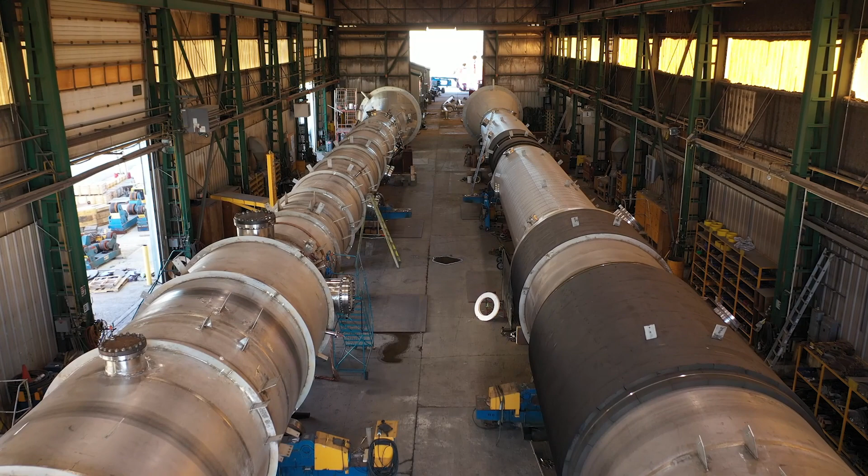As a leader in the Canadian specialized transportation industry for over 35 years, NCSG Crane and Heavy Haul was commissioned to transport 2 demethanizer towers sequentially in the summer of 2022 from Edmonton, Alberta to Mariana Lakes, Alberta, approximately 385 kilometers apart. Rather than the most direct route, NCSG utilized Alberta's high-load corridor.

The high-load corridor consists of designated highways that have the overhead utility lines raised to accommodate loads up to 9 meters high unless noted otherwise. The government funded the initial corridor construction, with the costs recovered from the users of the corridor through permit fees.

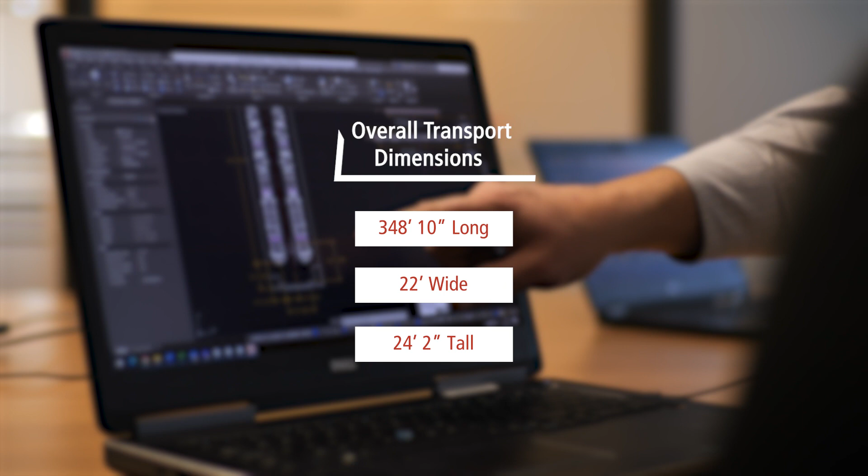The tower dimensions were 182 feet long, 15 feet 10 inches wide, and 17 feet 7 inches tall, each tower weighing 562,452 pounds. Overall transport dimensions were 348 feet 10 inches long, 22 feet wide, and 24 feet 2 inches tall.

Initial project discussions and planning began 2 years prior in the summer months of 2020. NCSG was officially awarded the project on September 1, 2021.

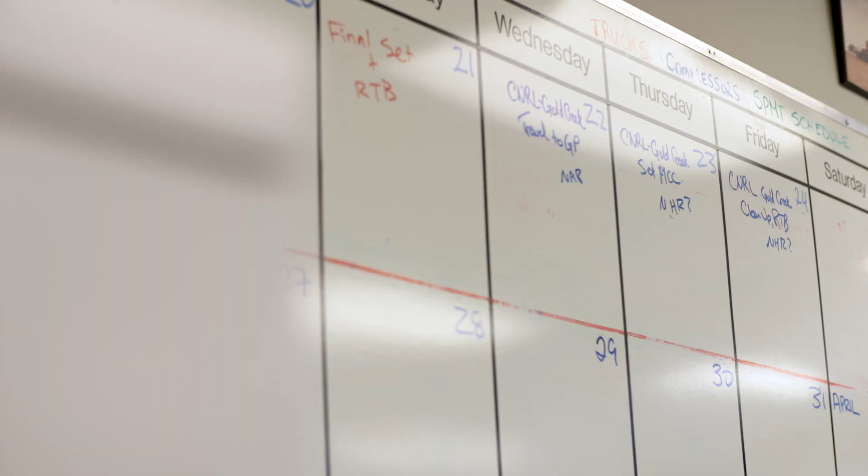Once awarded the project, NCSG Crane and Heavy Haul went to work, assembling a team including a project manager, permit coordinator, logistics specialist, engineers, and crew members. What sets NCSG apart from other companies would be our people and their willingness to find solutions for our customers' problems.

In its 35-year history, having never before completed a bunked 4-file utilizing a hydraulic trailer setup, nor transporting a load of this weight or magnitude, NCSG had to step outside of their comfort zone and deliver creative solutions for their client.

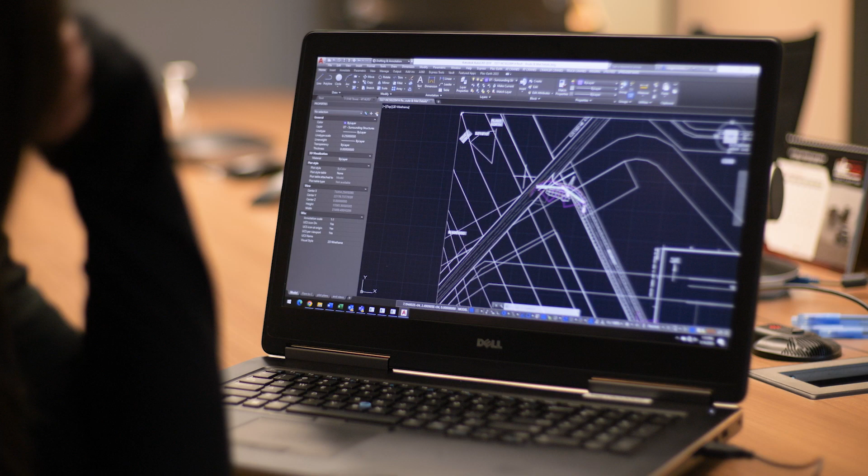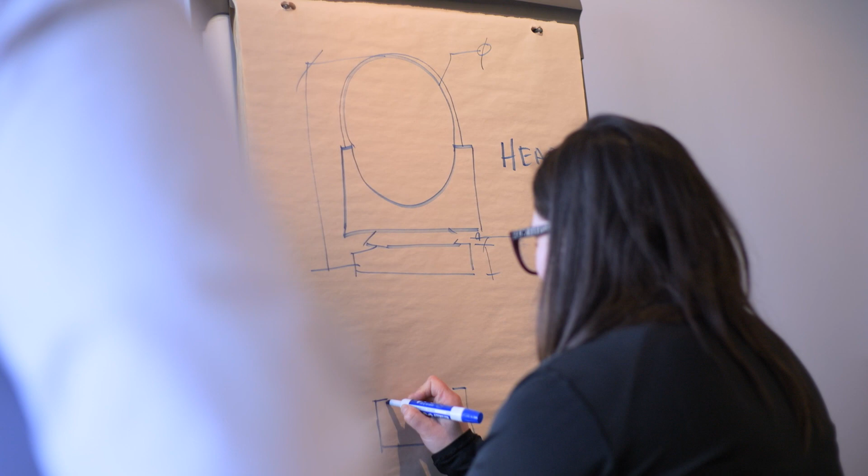The team worked efficiently and effectively, conducting route studies, applying for necessary permits, fabricating a custom steering frame, overcoming supply issues in order to source high-friction load securement rubber out of Eastern Canada, and even worked in partnership with a fellow SC&RA member to source turntables and modify saddles, customizing them to the shape of the tower.

The custom-built adjustable steering frame that NCSG had designed and fabricated was extremely innovative. The frame was designed to keep the rear trailer in alignment with the tower and lead truck along straightaways and minor curves in the road while maintaining consistent speed.

The steering frame was also a safety and efficiency innovation, as it eliminated the need for a steering operator for the bulk of the transport. The steering operator was only required along tight curves and at critical locations where the hitch was first disconnected.

The final configuration utilized 368 wheels with a 4-file, 14-line consecutive axle hydraulic platform trailer in the front, a 2-file, 18-line consecutive axle hydraulic platform trailer in the rear, 1 pull truck, 2 push trucks, 1 assist truck, 2 supervisors, and 5 pilot vehicles.

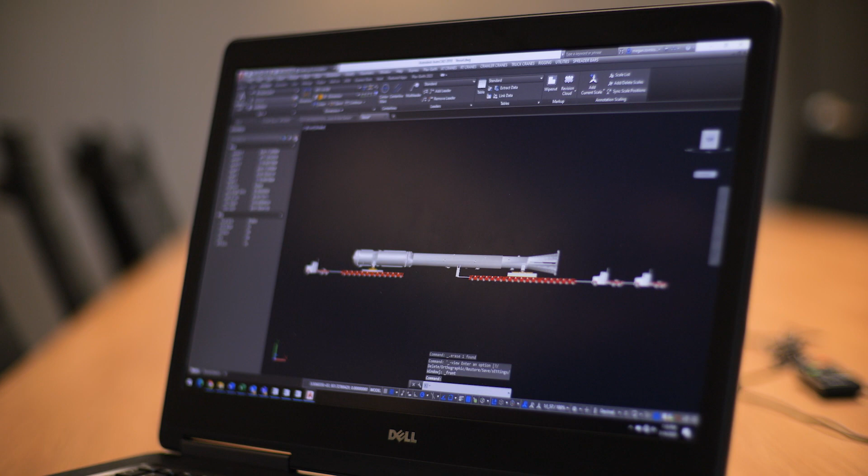Despite efforts in the planning, coordination, and customization phase, the original schedule was pushed back to October and November, as tower fabrication and site preparation had taken longer than anticipated.

Due to the delay in schedule, NCSG had to search for assistance in sourcing a gantry and SPMT for loadout, as NCSG's equipment was committed to other projects on the new loadout dates.

Working diligently with the first 2 moves approaching, NCSG was able to overcome a second and third hurdle: a power pole impeding the path of transport and a culvert on the route to the high-load corridor.

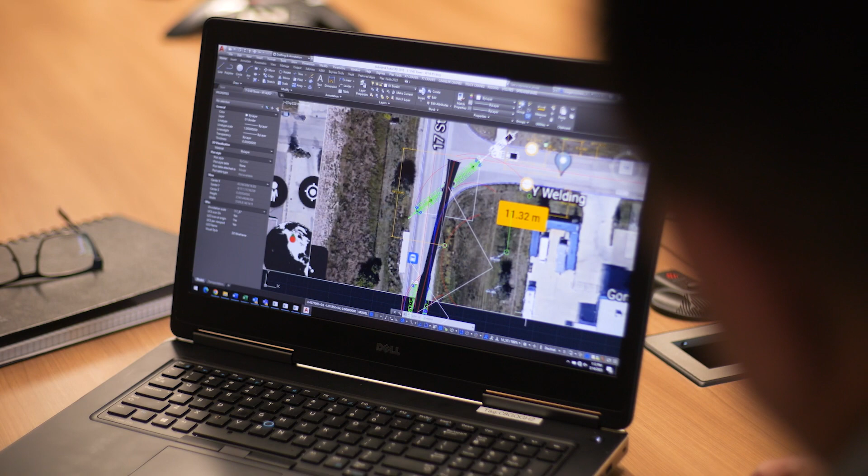With the assistance of a third-party company, NCSG was given clearance that the culvert had the capacity to cross based on the transport configuration. Working alongside the City of Edmonton and utility crews, NCSG was also able to have the power pole removed just 3 days before the first tower was scheduled to pull out of the fabrication facility.

In October of 2022, the first of 2 demethanizer towers was now completely fabricated and ready for transport. One of the biggest complications for NCSG came before Tower 1 even hit the highway.

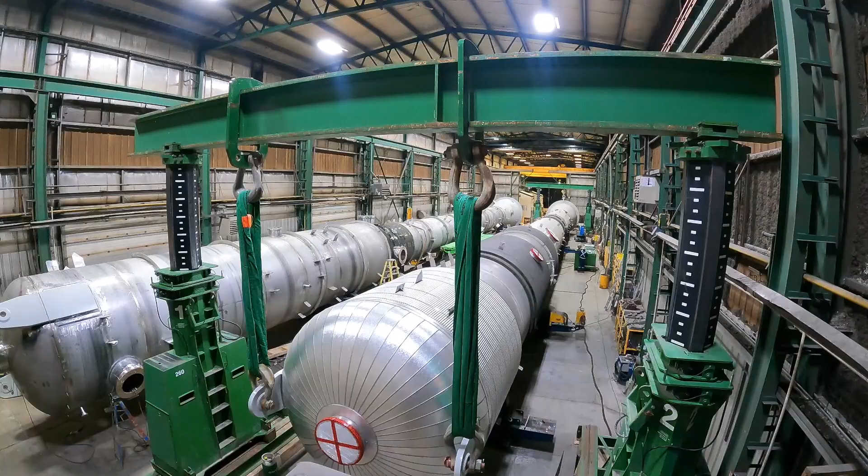Due to their sheer size and weight, removing these towers from the facility onto the trailers for transportation was no easy feat.

Utilizing gantries was the plan to get the tower loaded onto SPMTs. We initially had to set up the gantry, install the saddles, and then load onto the SPMTs, and then we were able to pull it out of the shop.

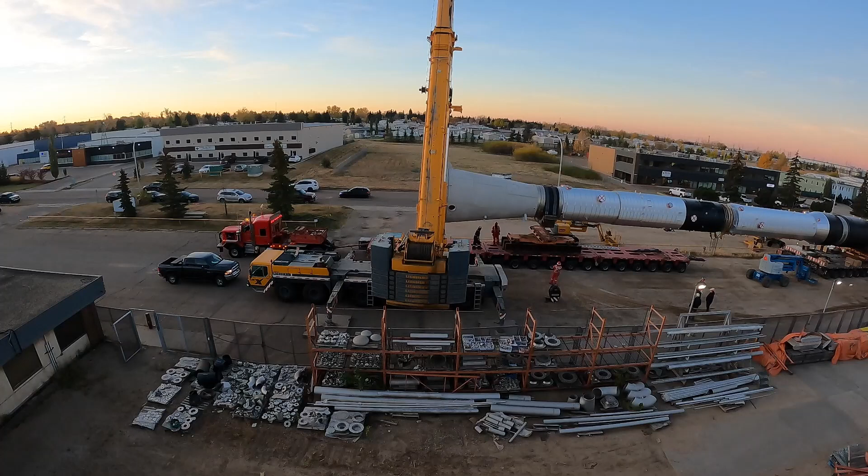With a full police escort and the first tower loaded and secured, NCSG was en route to the high-load corridor. The last obstacle in the superload's path was a railway crossing.

NCSG enlisted the support of the Canadian National Railway to supervise, oversee, and time the superload's crossing to ensure safety was maintained and train schedules were not impacted.

NCSG also enlisted the support of a third-party engineering firm who followed the load to monitor each of the 10 bridge crossings along the route.

Over the tracks and onto Alberta's high-load corridor, it was smooth sailing and business as usual for the experienced NCSG team and supporting companies. From the fabrication shop to site, the transport was completed over 5 days with 4 predetermined staging locations along the route.

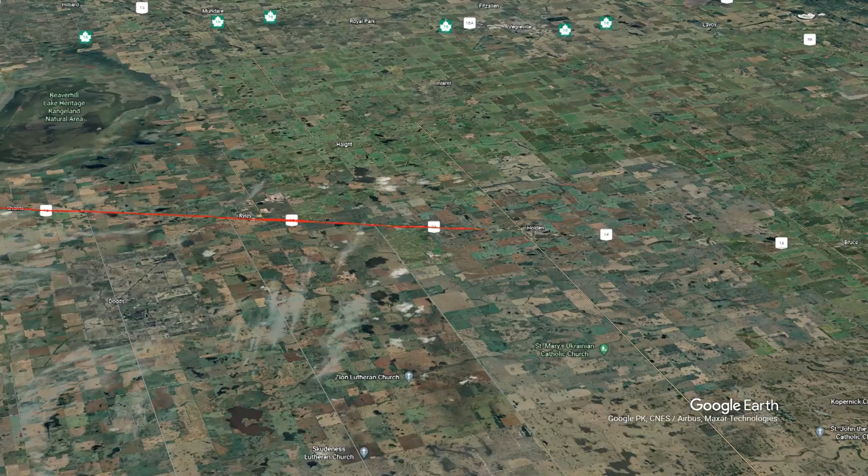With safety being NCSG's #1 core value, a toolbox talk was held each morning with all crew and supporting members to discuss the route plan, propose staging areas, answer any questions, and ensure all crew members were working in unison toward one common goal: reaching the next checkpoint safely.

Once we've planned it out, figured out the trailers and the trucks and what we need there, we bring in the field staff. We go over all the hazards that would come up and how we're going to mitigate them. We put that into a THA format, which the guys read through. When they get to the load itself, we do a tailgate meeting involving pilots, police, trucks, anyone involved with that load, and that's done daily.

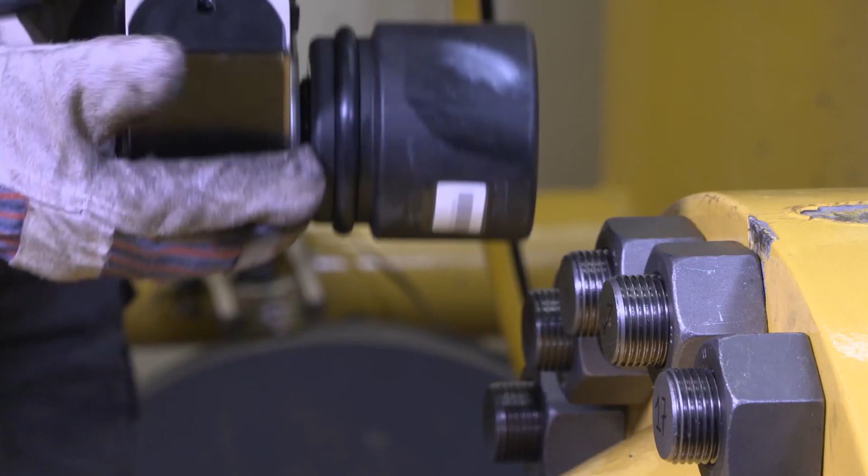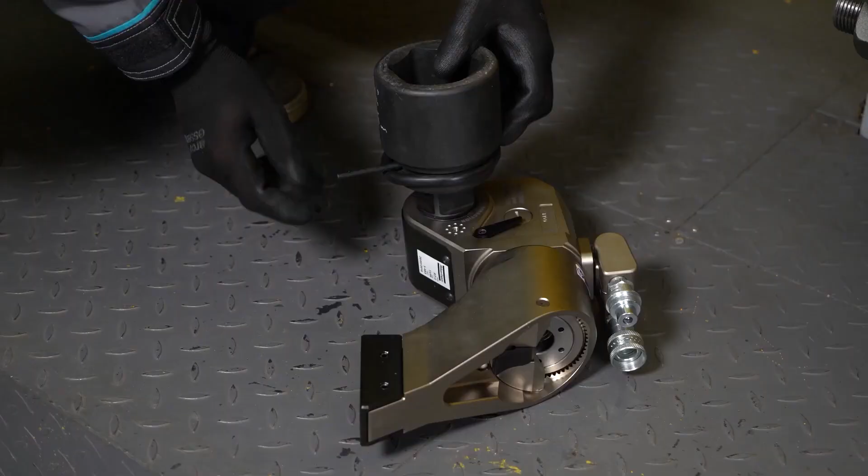Prior to departure each day, bolts were checked for securement and to ensure the nuts on the bolts were not rotating. A special hydraulic torque wrench was sourced to tighten any bolts required throughout the duration of the transport, with the capacity to tighten bolts of 6 inches in diameter.

Throughout the transport and for additional safety, NCSG added the support of a second rear pilot vehicle to notify drivers of the slow-moving superload ahead. The convoy was also advertised online and across local radio stations through Alberta 511, keeping the general public informed throughout both moves for their safety and planning.

Throughout the duration of transport, neither of the 2 loads exceeded a speed of 25 miles per hour.

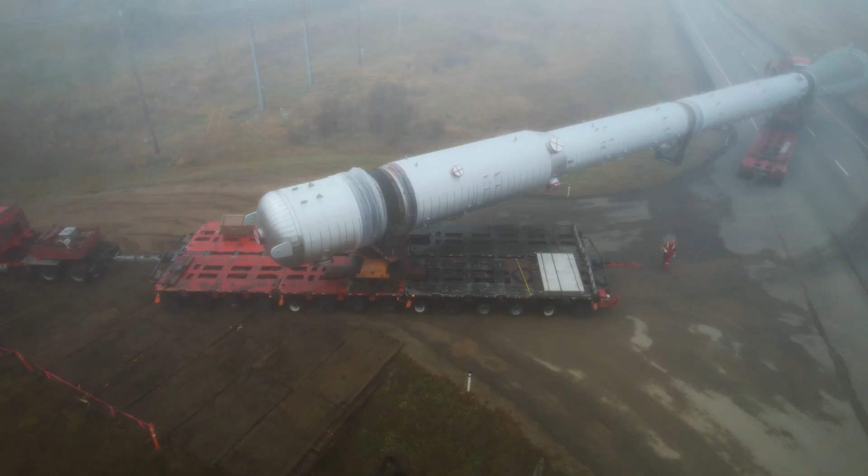Upon exiting the high-load corridor, NCSG was presented with the challenge of navigating an extremely tight road with sharp corners. During the planning stage, the road from Highway 63 onto the site road was quite concerning, and due to us not being able to place civil there, additional swamp mats were placed in the corner where the lead driver was planning his turn.

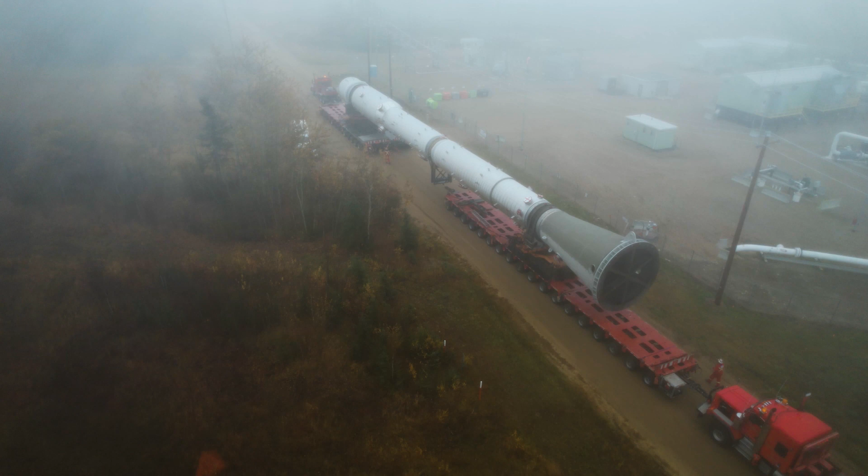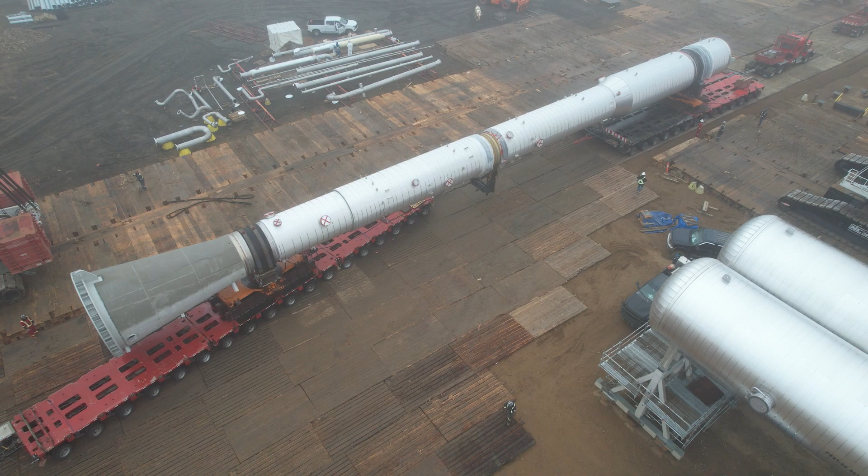After meticulously navigating the tight roads into site, the tower was carefully offloaded and set into place. The support equipment and bands were delicately unbolted and saved for the second transport. The NCSG team then mobilized back to Edmonton for preparation and transportation of Tower Number 2.

With 2 weeks to reset between loads, a winter storm had rolled through Edmonton, dumping snow and freezing roads, making conditions and safety much more complex.

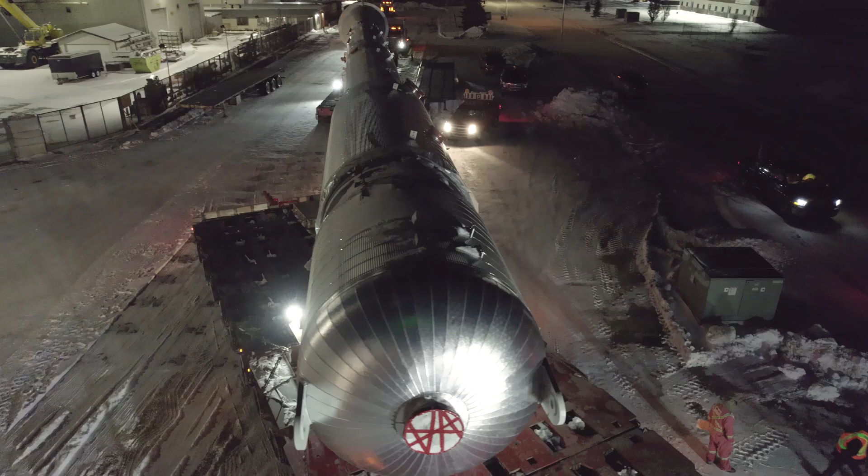Upon careful extraction from the fabrication shop, NCSG was ready to roll with the second tower. The City of Edmonton did not have enough time to clear the roads of snow prior to the second tower's departure, so it was up to NCSG to chain up the trucks for additional traction and coordinate a tow truck company to remove parked vehicles along the route from the fabrication shop to the highway.

With the assistance of a second police escort, the tower arrived at the first checkpoint, where it would depart for the high-load corridor the following morning.

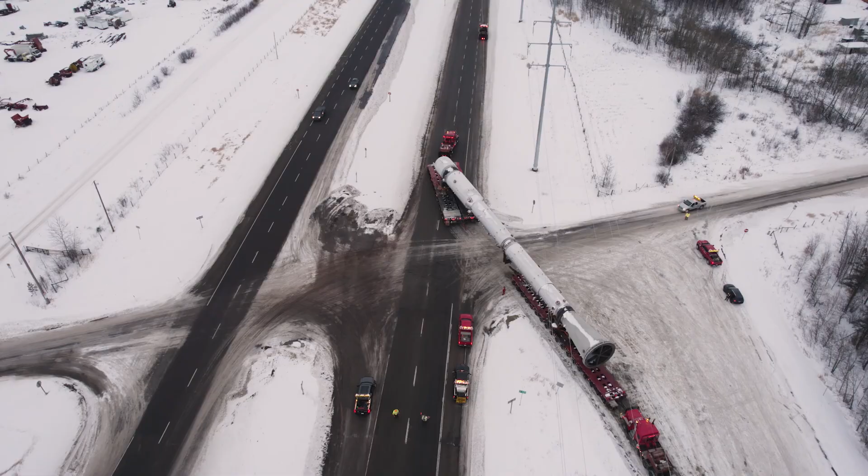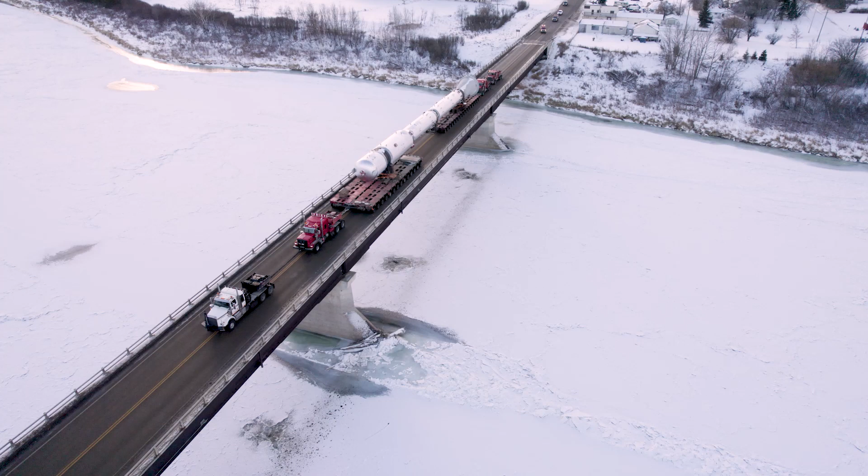Due to the winter storm and road conditions, NCSG had to quickly secure additional approvals from the Alberta Transportation Department for the use of an extra pull truck to cross the Duvernay Bridge. The extra pull truck was required for both traction across the icy bridge as well as the 5% grade that followed the river crossing.

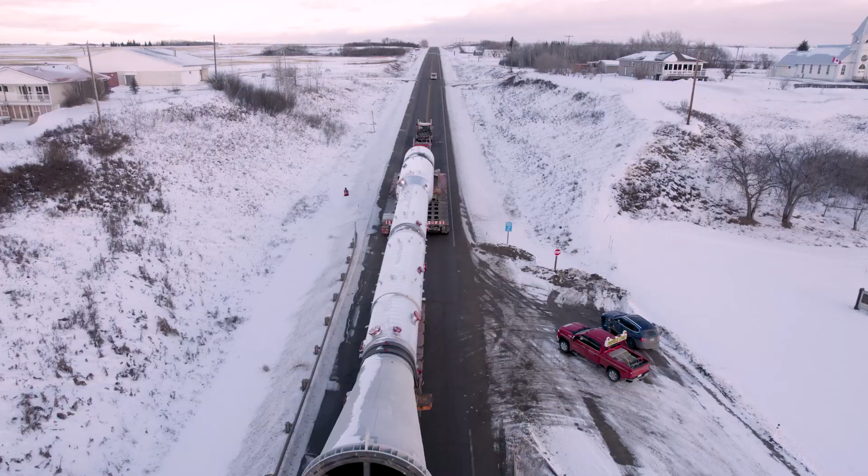Yeah, so a load of this magnitude, starting at the planning stages, we've picked the proper trailers, the bunks, tie downs. We want to ensure that when it leaves the factory it's showing up at site how it left. So that involves a lot of engineering, a lot of route studies, driving the route, ensuring there are no obstacles in the way that we're going to hit. So that's a whole team effort.

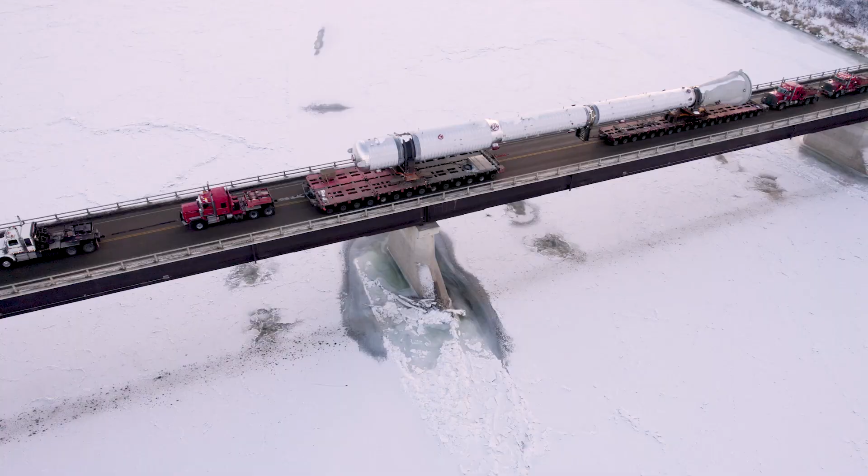The idea and the knowledge and the culture within our group is that we all get home safe, and we can do that by working together, all rowing the boat in the same direction. That's our whole team motto, team culture here. When we're safe at work, we're safe at home. We want to see everyone back. We're a big family.

After exiting the high-load corridor, the NCSG crew meticulously navigated the final leg of the journey down the narrow road and tight turns leading to site.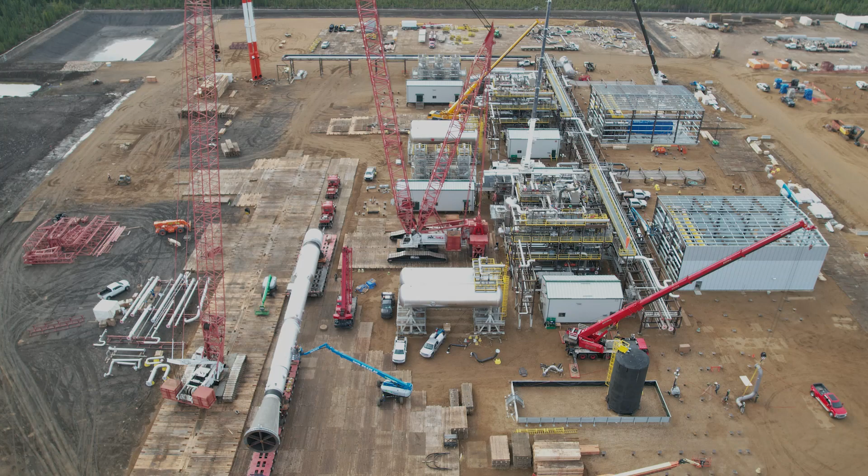With a combined 2,326 man-hours from project managers, engineers, permitting teams, and crew members, NCSG met every challenge safely and successfully, completing the project on schedule and within budget with no recordable injuries, illnesses, accidents, incidents, or damage to property or equipment.

In our 35-year history, these two transports are the longest and heaviest loads we've ever transported over the road. I couldn't be more proud of everyone involved in this project. It's certainly one we'll never forget.

This project would not have been possible without NCSG's clients, partners, and supporting companies who worked diligently providing expertise and industry best practices, including Alberta Transportation, Canadian National Railway, City of Edmonton, Edmonton Police, Geometrics, Headwall Engineering, NextGen Transport, Premay Equipment, and CAN Traffic.